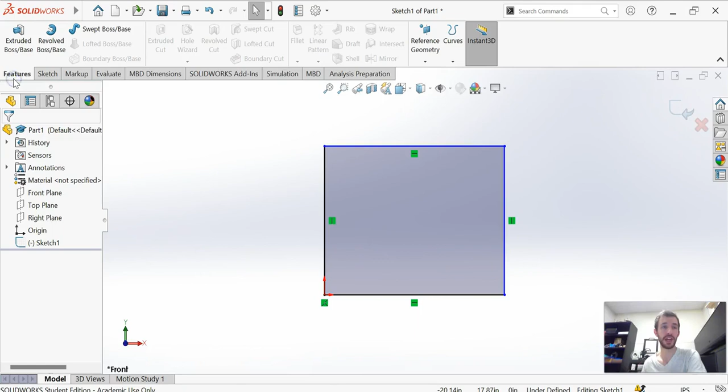Okay, so last time we talked about how we have a rectangle, some shape, it just has to be a closed contour. We go to the Features tab and click Extruded Boss Base. I can go from a two-dimensional shape, which is really tiny, so let me change these numbers to 25, there we go, to a three-dimensional shape. If I hit that green checkbox, it is now a three-dimensional shape. What you'll notice is that your sketch disappears. It gets eaten by the three-dimensional shape. The 2D shape goes inside of the 3D shape.

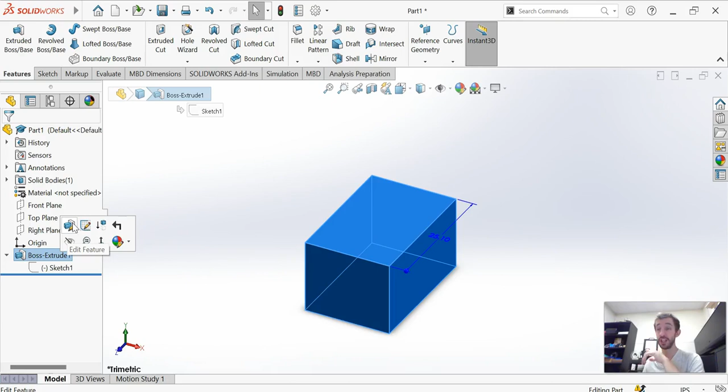Interestingly enough, if I change the sketch, the 3D shape will automatically update, which is nice. If I want to change my feature or settings, I can click on this guy right here, and I can either click Edit Feature, which is this one, or Edit Sketch if I want to change the sketch. I want to click on Edit Feature because I want to show you some more of the options.

So last time we learned about Blind and Midplane. We're not going to hit any of the other ones yet—we need to get some more features, get a bit more complex before we do that. What I want to show you right now is this button right here. Now what is this? This is called Draft. Draft simply says that I might want my object to get smaller as it extrudes, or to get larger as it extrudes. This can save you some time, make it a little bit easier.

So if I click on this, it will immediately begin to do this. You can't really see much of a difference right now, but as I change the angle, you will rapidly see that, hey, this is getting smaller. And it gets smaller by an angle—so I'm going down by 5 degrees. I can also click on Draft Outward to get bigger by 5 degrees.

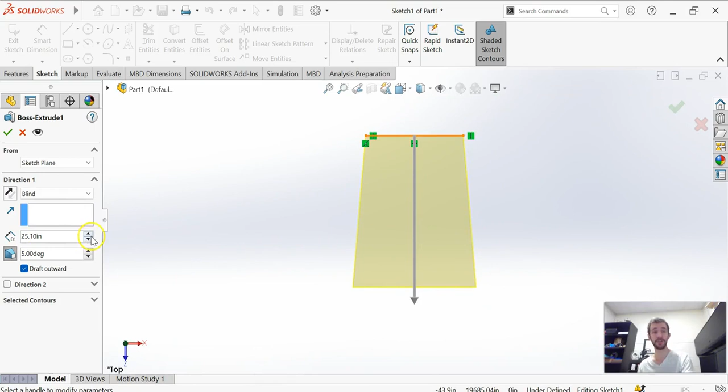And so this line right here, if I had a perfectly horizontal line, I'll look at it from the top—it'll be an easier way to see it. So if I wanted to, I could have a line going straight down right here. The angle between those two lines would be 5 degrees. It doesn't change, and as I go out, it will get bigger. Or if I decide to go inward, it will get smaller.

You can do these for a lot of things. It's really good with taper. Sometimes you want a cone to taper down a little bit—it's an easy way of making a cone. So lots of things we can use for that.

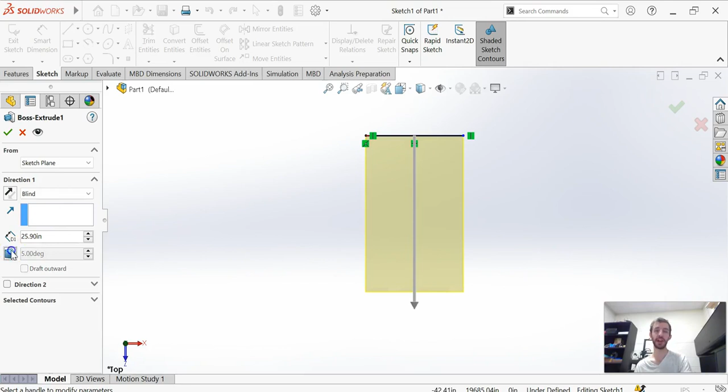Okay, I'm going to remove that for now because I don't need that. Okay, and let's go back to an isometric view. Ooh, do not like that one. You know what, we're going to allow that to be. There we go, good as it can be.

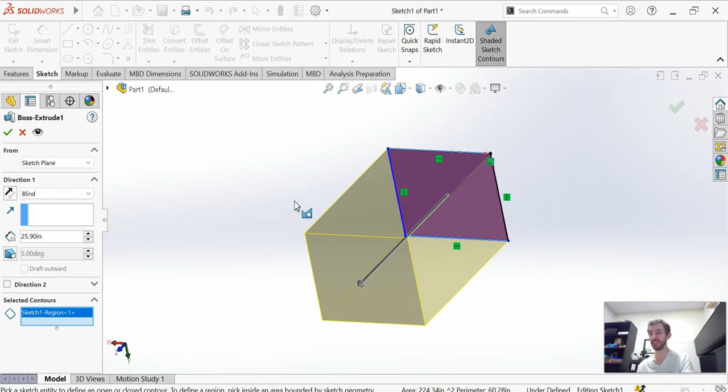Second thing I want to talk about is Selected Contours, right here. Now this is usually how you will tell SolidWorks, hey, this is the shape I actually want you to extrude. If I have a bunch of closed contours, maybe you don't want to do all of them, or sometimes it gets confused. Like if I had 2 boxes right here—actually I'll just go ahead and show that to you.

So I'm going to go back down here and edit my sketch. I've got 1 box right here, but what if I had a second box? And what if I only wanted to extrude this border, not the center? Seems reasonable. But how do you tell SolidWorks which ones you want? I'll actually add a little bit of extra stuff too.

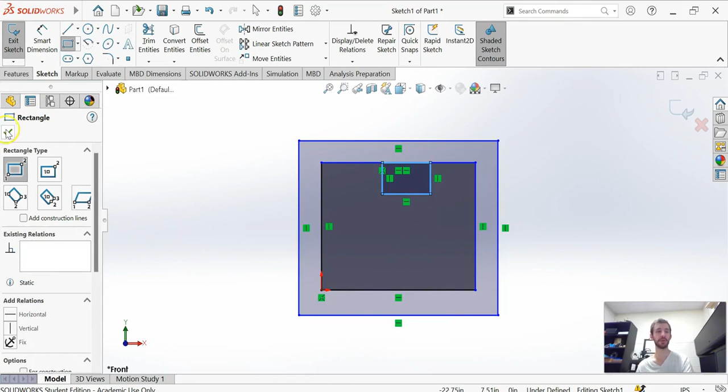Okay, so I'm going to exit my sketch. It gets angry at me. Exit the sketch and rebuild anyway. And the reason it got angry at me is because it had no idea what to do right there—it's like, okay, the feature I was messing around with is gone. So right now it doesn't know what it wants to extrude. Usually it will do this for you automatically. It can make a good guess, but it's not always right.

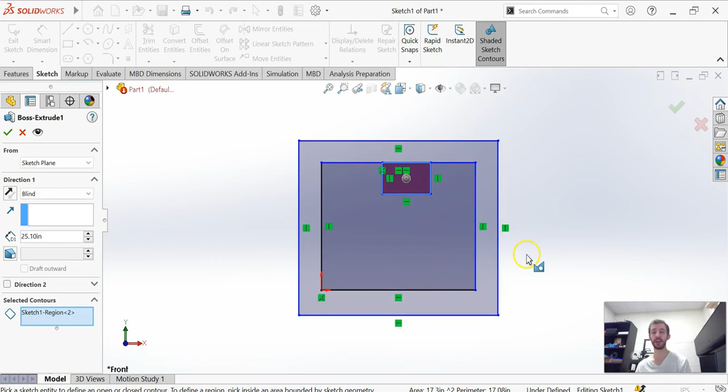So if it guesses wrong, click on the Selected Contours button, look at it, and then you select what you want to actually extrude. You can select multiple things. I can select all of them if I want to. If I don't want a piece of them, I can unselect them by clicking them again. Then I do it again, and suddenly I have a 3D shape, but now with a strange, jaggedy tooth in there. It works—it's not terribly difficult.

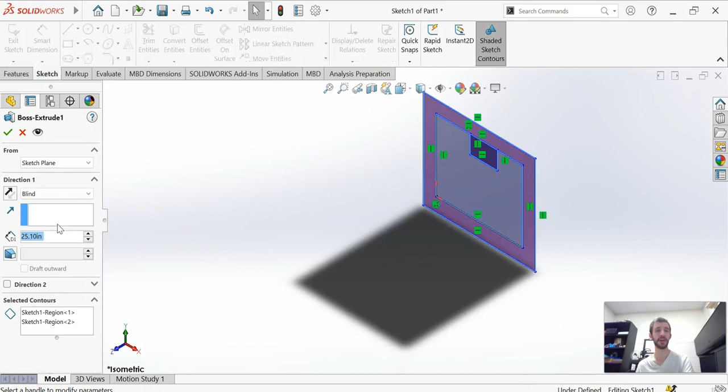So with that in mind, hopefully this helps you get a little bit better idea of how the Boss-Base Extrude works. We will be going into some more detail about these other options, like up to vertex, up to surface, offset from surface, up to body, in the future. We'll also talk about the From option right here, where I can change where it is actually coming from.